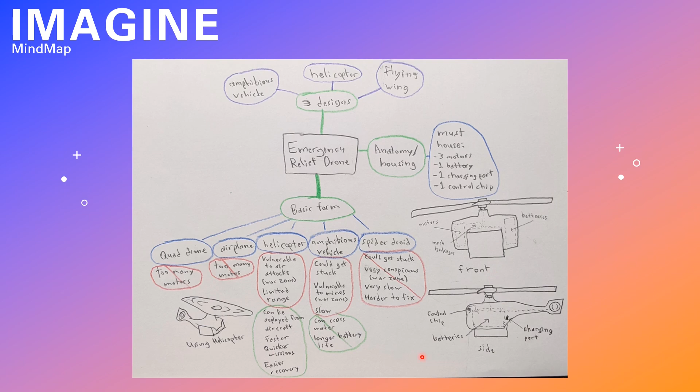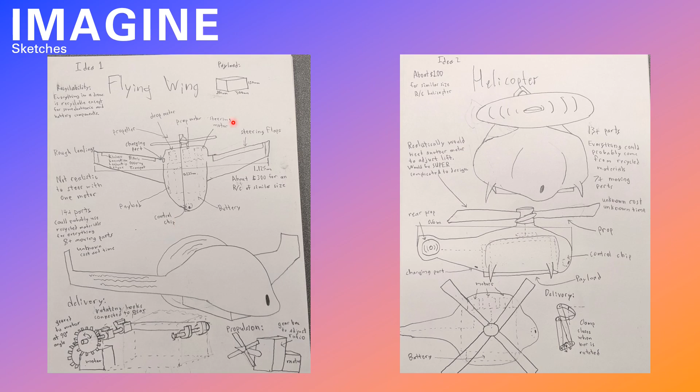In order to arrive at this design, I started off with brainstorming. I had the idea for an emergency relief drone, then started thinking about what form it should take. I played around with five ideas from the start, keeping in mind what it needed to have and what it was restrained to. From all this, I came out with three designs: an amphibious vehicle, a helicopter, and a flying wing. I was leaning heavily toward the helicopter, so I did three full-blown sketches trying to figure out the logistics - the flying wing design, the helicopter design, and an amphibious vehicle, which I came up with off the top of my head because we needed three.

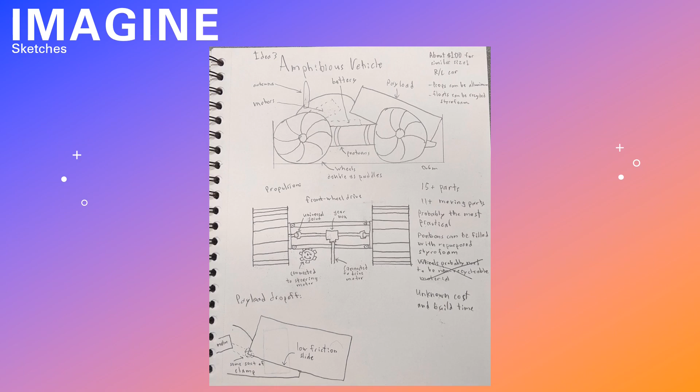Then I started going through the decision matrix. I lost the original file, I don't know where it went, so this is a reconstruction. I basically started weighing all the pros and cons. Something very important to me, that wasn't really part of the parameters, was that I really wanted it to be realistic. Flying vehicles, by design, inherently need at least two motors in order to steer, which wasn't going to work within the confines of this project. So I chose the amphibious vehicle because it only needs one motor for steering. I also thought it would be cheap - maybe the others would have cost more. We'll get to that later though, the projected price ended up surprising me. As you see here, it says one motor for power, one motor for steering, one motor for delivery mechanism, and that's why I only wanted one motor for steering.

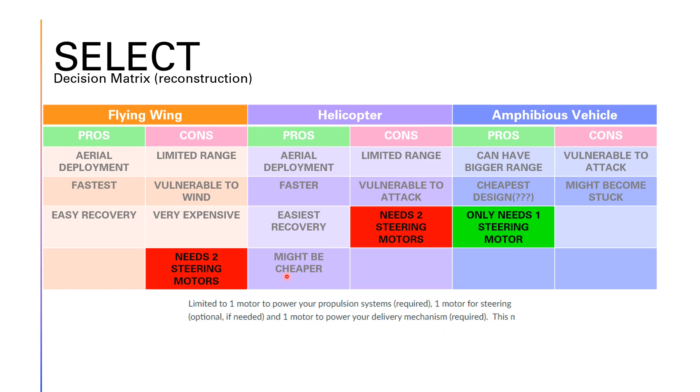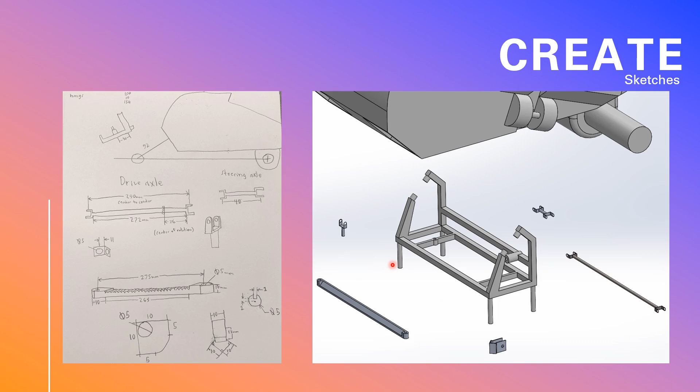So I got into sketches. I'm pretty good with visualizing 3D parts and assemblies in my head, but some of these things had to be very specific, and that's when I got out the paper and physically drew it out, did some math. I wanted to make sure I could make all the parts separately and then have them come together nicely. I've recreated some of these drawings - these were just random parts I was working on at random times, not necessarily part of the same family, but they happened to all end up on the same paper. That was kind of my process, doing what I can without writing things down, but when I needed to write stuff down, I wrote it out on paper and then modeled it.

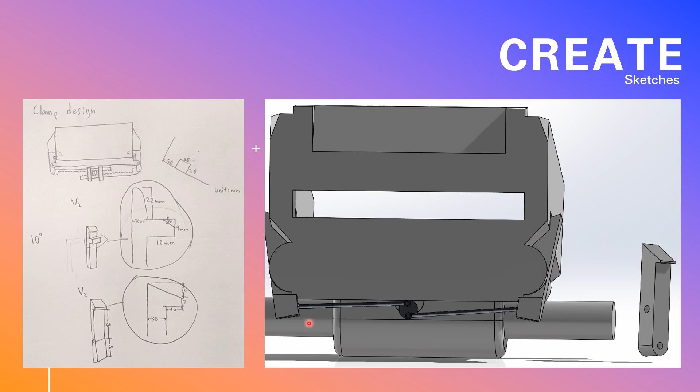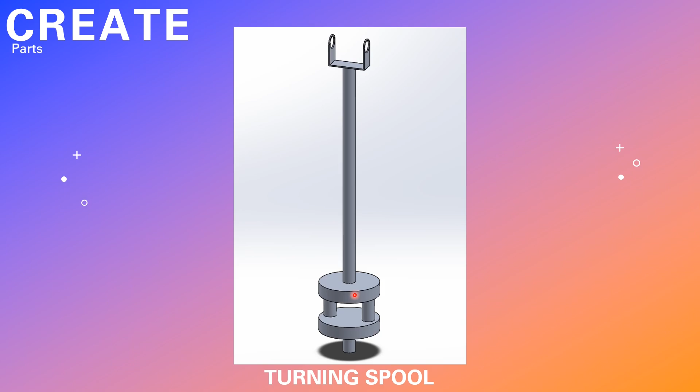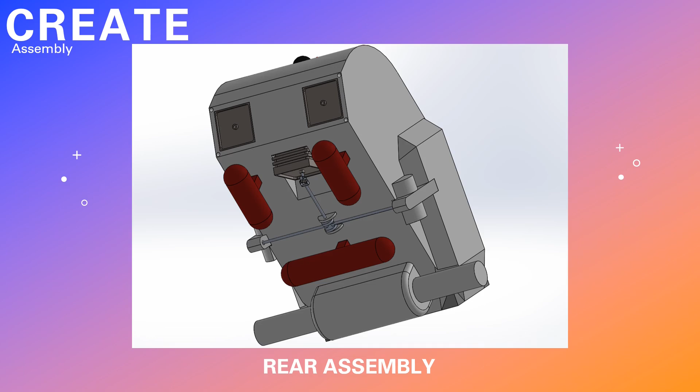Here is our assembly for the main body, where we have the package relief mechanism, and you can see it hooks up to the motor. So when the motor rotates, it translates the motion through this universal joint into here, and it causes these levers to get pulled in, and on this end is where the package is held in place. It basically rotates about 90 degrees in order to release or grip the package.

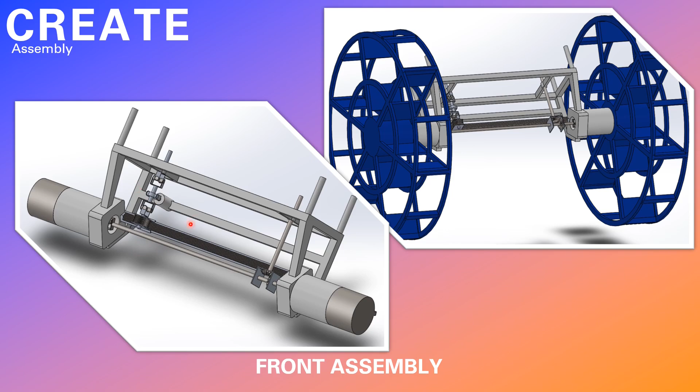And then this was the front assembly, where we have it here without the wheels so you can see it better. This is with the wheels, and this is what it looks like on the drone. We'll take a closer look at this and this later.

So this is for the propulsion motor. The motor is attached to this rod, it goes through these bevel gears, gets translated 90 degrees, and then rotates this rod, which is connected to the wheels. And then here is our steering, which apparently wasn't required.

I thought it was a requirement until I read the instructions more carefully right before submitting. But anyways, this looks more complicated than it is.

It's basically one axle that's connected to this gear, which causes this - I forget the term for it, but it's like a flattened out gear. It causes it to move side to side, which causes the wheels to turn a bit.

And this is basically one axle, but I added two universal joints because this gear moves up and down, so the motion had to be able to smoothly translate, or else it would just break itself.

And then here is basically our front axle where it's connected to the mechanism, and this is where it would turn side to side. This connects to the main bracket. This right here connects to this rod with another universal joint, and it all kind of works. We'll be able to look at it in motion later.

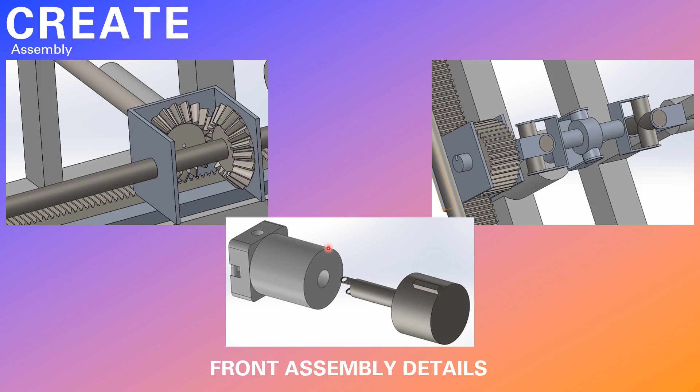It's supposed to be amphibious, so I have these little float pontoons underneath it. You got a better look at them earlier from the underside.

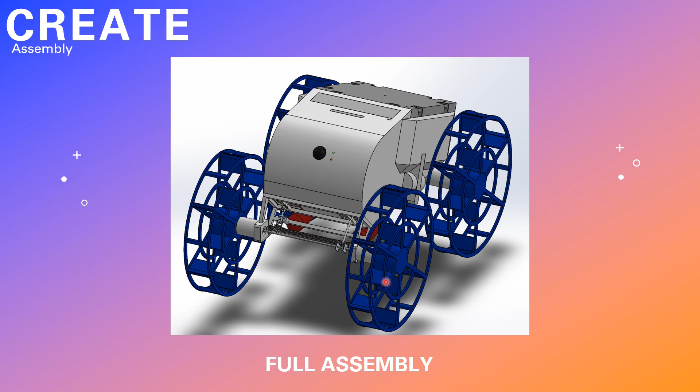And then these wheels are designed to roll on land, but also paddle water. I thought these paddles would have to be curved instead of straight. But then I looked at some water wheels and they actually are straight like this, like those big paddle boats on the Mississippi. That's what these wheels are based on.

Then one thing that kept happening - what I used for my steering is I basically took this gear piece and I opened it up and I customized it, and it works great, but every time I reopen the document, for some reason it reverts to its default, even though this is saved as a distinct file, as its own file.

So I'm not sure why that is. I'd have to learn a lot more about SolidWorks to figure it out. And so yeah, I just get this error message every time. It looks like this, it's clipping through. So I just have to swap it out for the custom version I made and it's all good.

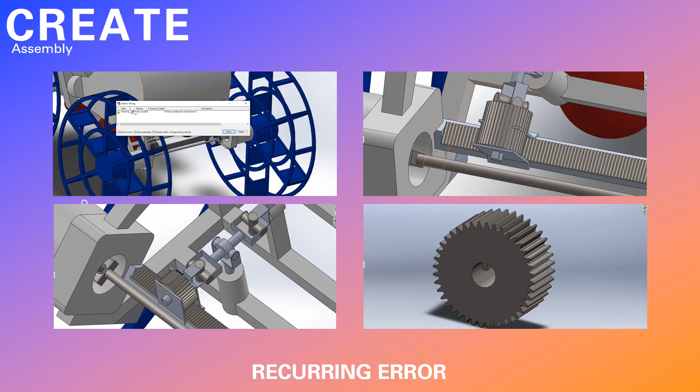And then this is what it looks like in motion. Hopefully it plays correctly. There we go. Yeah, so the steering is not as smooth as I would like.

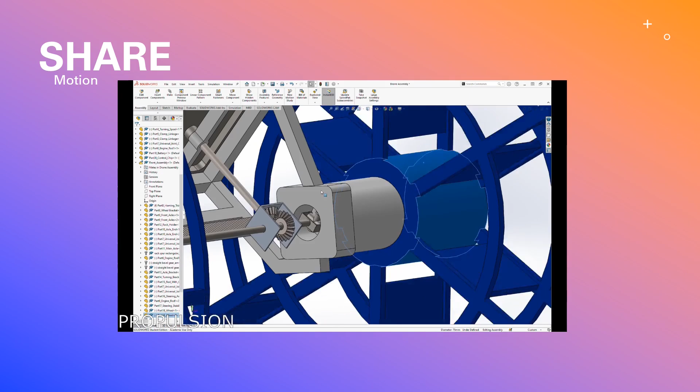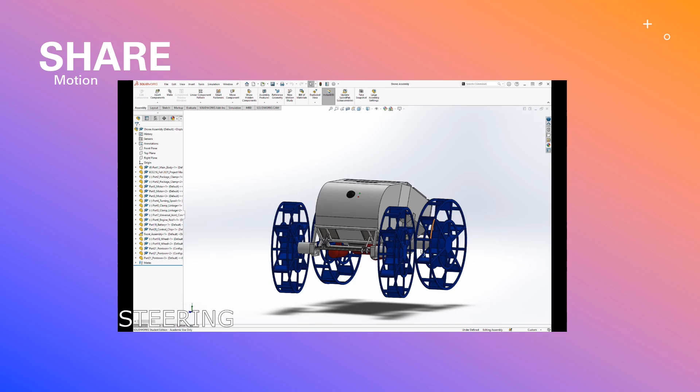It kind of has problems. The wheels turn fine. The clamp works perfectly. It worked much better than I ever expected it to. And I didn't have to tinker with the clamp. I just put it together the first time and it worked and it was great. And that was the first and last thing to just work.

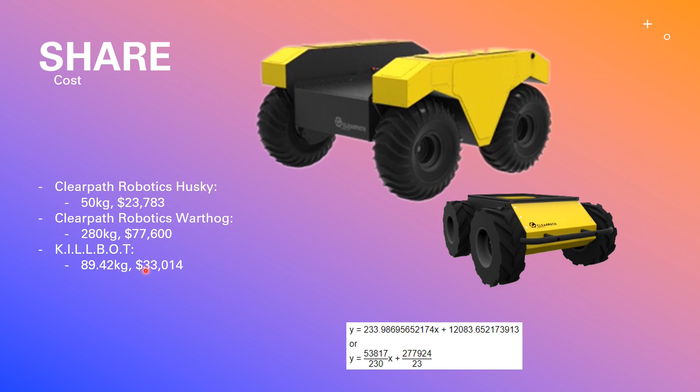And so I plugged the mass of my robot into that, and I was able to get a price of $33,000, which is really high, much higher than I was expecting. But I would probably be able to make it cheaper because my drone is basically a giant hunk of PVC in the middle. That's the material I set it to in SolidWorks. So I'm sure if we were to build it with actual parts on the inside instead of that, and build it to where it's light enough to go on water, it would cost much, much less than this.

And so, in conclusion, I think I learned a lot from this project. I learned steering systems are very difficult, and if you were to do one that actually functions how it's supposed to, it would be even more difficult. UGVs are expensive, like shockingly expensive, and gears do not work like normal parts.